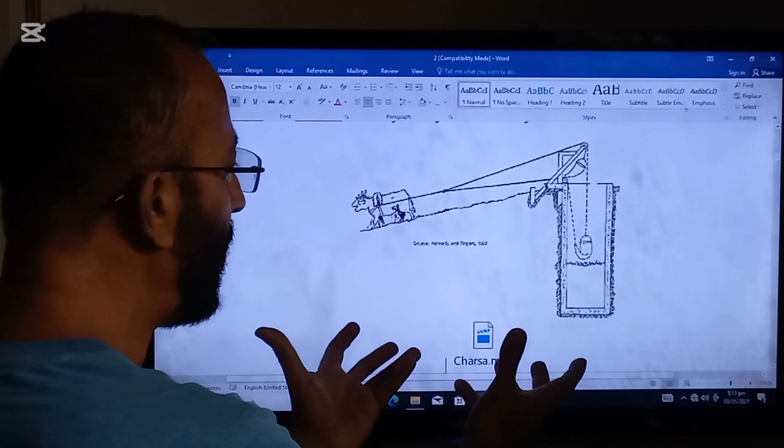This is a diagrammatic representation of this system, that is charsa. One side is animal power and on the other side a bucket is attached that brings water from the well, canal or river into the agricultural field.

We are going to show you a video to understand this type more clearly. So this bucket is bringing water out of the canal, river or well, and on the other side animal power is attached.

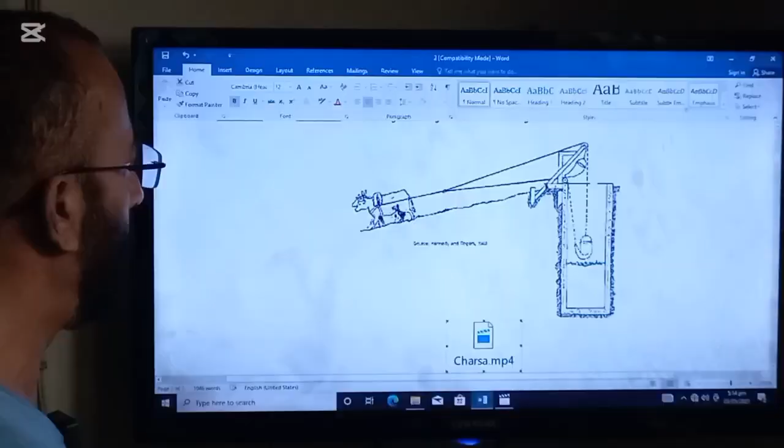The next category is Persian wheel, an improvement upon shadoof and charsa. It consists of a horizontal wheel attached loosely to a vertical wheel. An animal, donkey or bullock, moves the horizontal wheel that in turn moves the vertical wheel. A number of buckets are attached to the vertical wheel and they are dipped into a traditional well to get filled with water.

As the buckets are brought upward, they are emptied into a long narrow duct or canal that carries water to the nearby agricultural field. It is more efficient than the shadoof and charsa methods and therefore still used by many subsistence farmers, especially in the Barani areas like the Potwar Plateau.

It irrigates a relatively greater area of land in lesser time. Advantages of the Persian wheel: it is a cheap method of irrigation, few workers are required, animal power is used, and there is enough availability of water on time. But the disadvantage is that the Persian wheel can be used for small scale only.

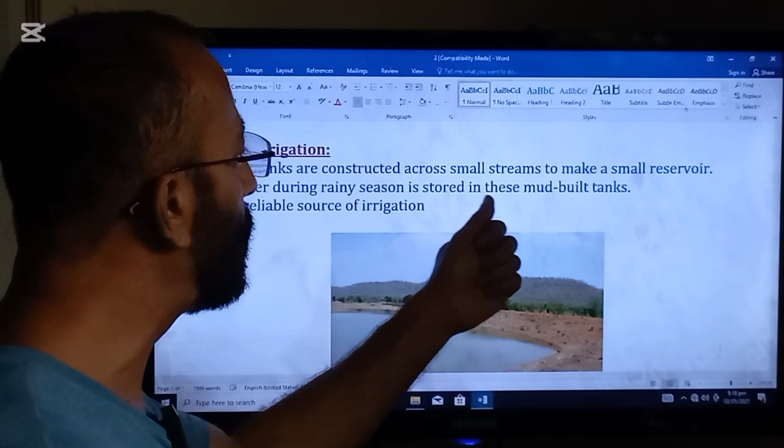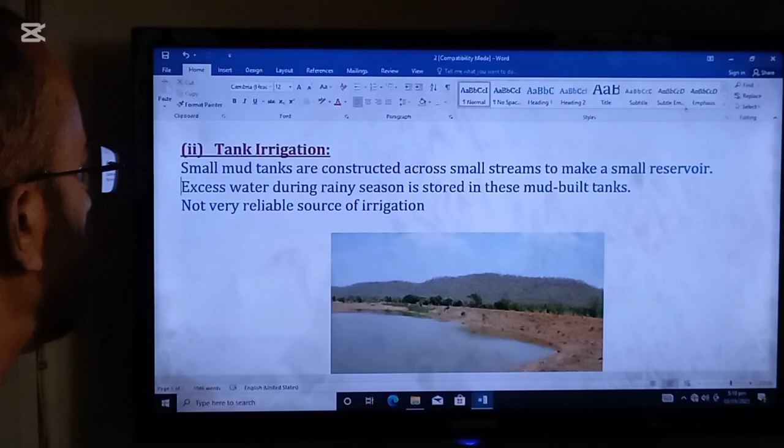Next type is karez, restricted to selected areas of Balochistan. It makes use of the raised water table in the foothills. A horizontal subterranean underground canal is dug in the foothills. The canal runs from a few to several kilometers before it opens on the surface to supply water to the agricultural fields.

In order to maintain and desilt it regularly, vertical shafts are installed at intervals. As it remains underground, loss through evaporation is minimum. A single farmer cannot afford it, so a group of farmers jointly build it. Repair and maintenance is difficult and costly. As a result of the recent drought-like situation, several karez in Balochistan have turned incompetent.

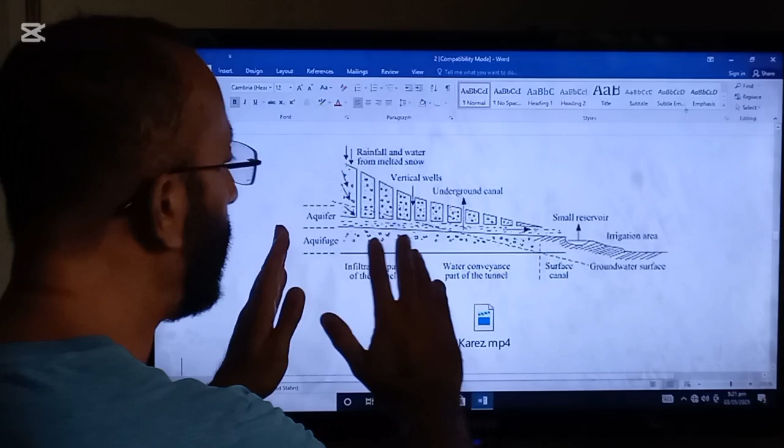Once built, labor of the work is not required. Water does not evaporate in this method. This is the only available source for miles in dry areas. Here is a diagrammatic representation of the karez.

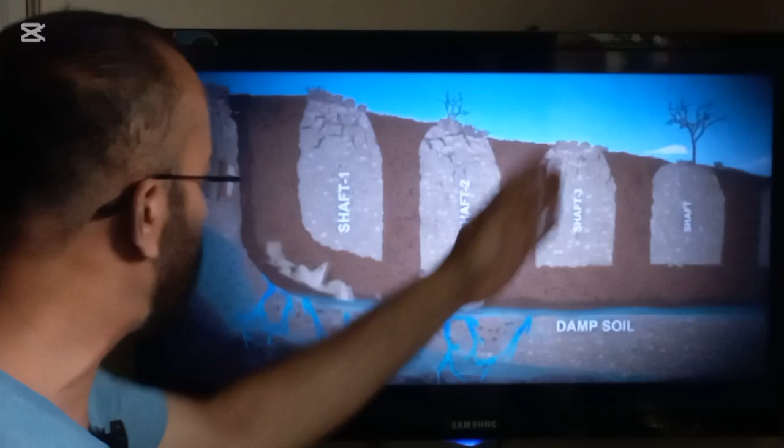We are going to show you a video to understand it more clearly. This is the mother well from where water is coming, and these are shafts to desilt the canal on a regular basis. Here water is coming from the mother canal to a long area. Look here, and from here water comes to the surface, and water is provided to different agricultural lands.

Okay, next are modern methods of irrigation. These include perennial canals, tube wells, tankers, sprinklers or spray irrigation, and last one is trickle or drip irrigation.

The first type we are going to read is perennial canals. Taken out from water reservoirs, dams and barrages to supply water to Rabi, that is winter, and Kharif, that is summer crops, supplying water throughout the year. An extensive and complex network of canals exists in Punjab and Sindh, designed along modern lines by the British and later improved under the 1960 Indus Water Treaty.

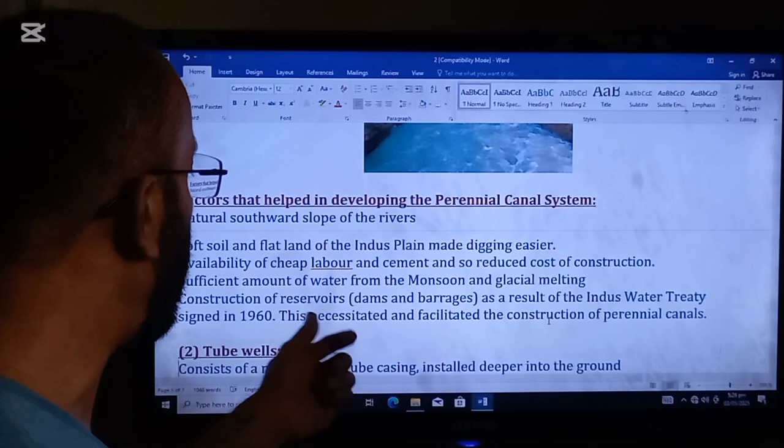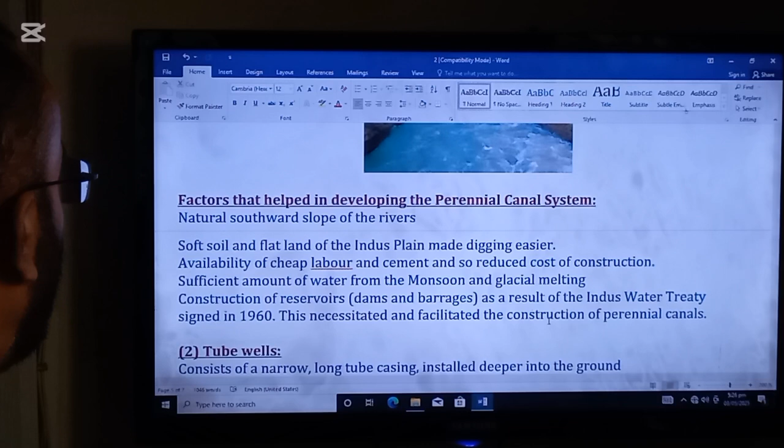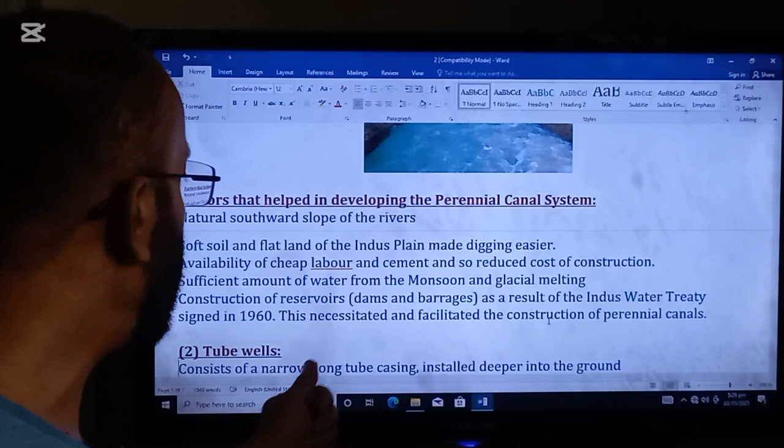Next topic is factors that helped in developing the perennial canal system: natural southward slope of the rivers; soft soil and flat land of the Indus Plain made digging easier; availability of cheap labor and cement, reducing cost of construction; sufficient amount of water from monsoon and glacial melting; and construction of reservoirs, dams and barrages as a result of the Indus Water Treaty, signed in 1960. This necessitated and facilitated the construction of perennial canals.

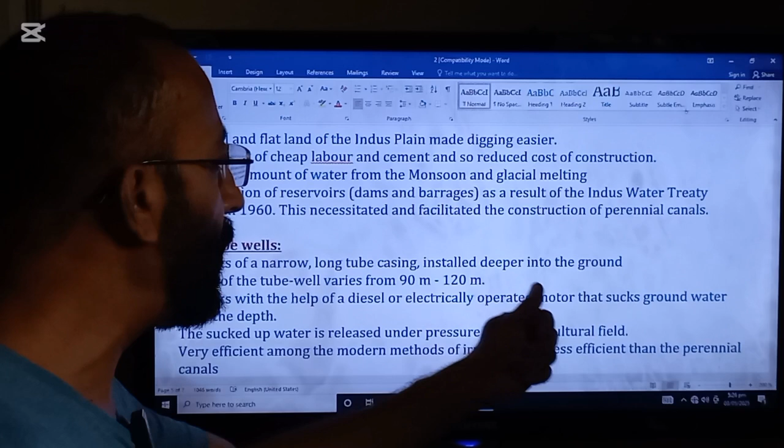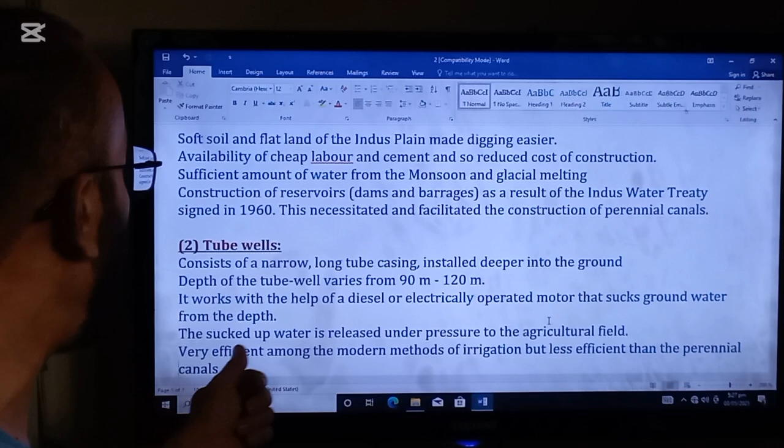Next type we are going to read is tube wells. They consist of a narrow, long tube casing installed deeper into the ground, with depth varying from 90 to 120 meters. It works with the help of a diesel or electrically operated motor that sucks groundwater from the depth, and the sucked up water is released under pressure to the agricultural field.

Very efficient among the modern methods of irrigation, but less efficient than perennial canals. No risk of waterlogging and salinity. Tube wells are rather used to treat some problems, and are very popular in Barani areas of Potwar and Balochistan. Tube wells are used on commercial levels.

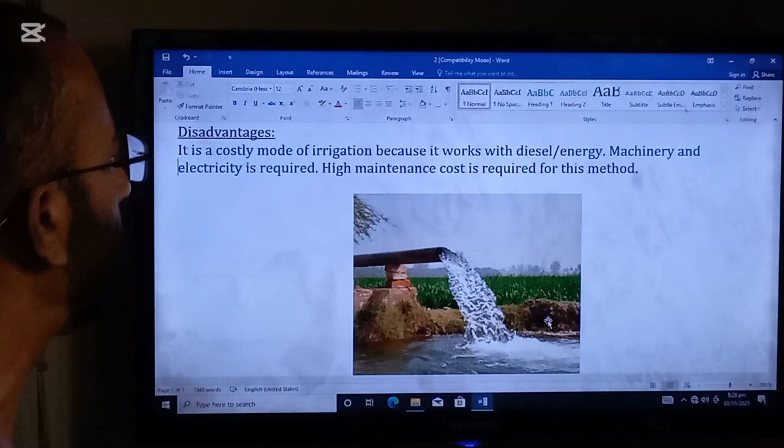Disadvantages of tube wells: it is a costly mode of irrigation because it works with diesel and energy, machinery and electricity is required, and high maintenance cost is required for this method. And this is a diagram of the tube well.

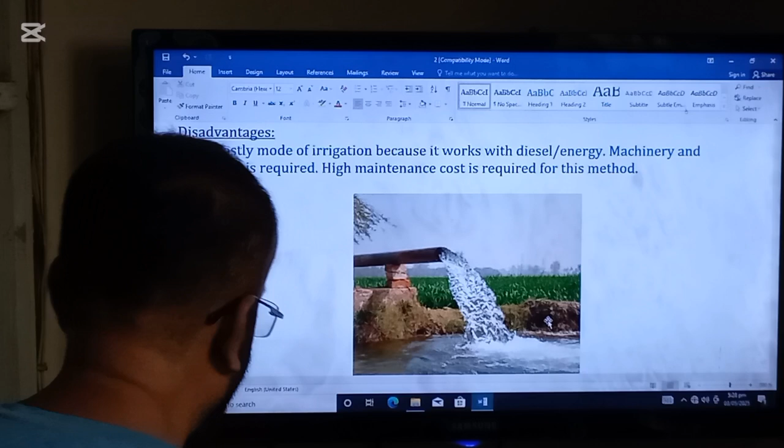Now we are going to show you a video to understand this method more clearly.

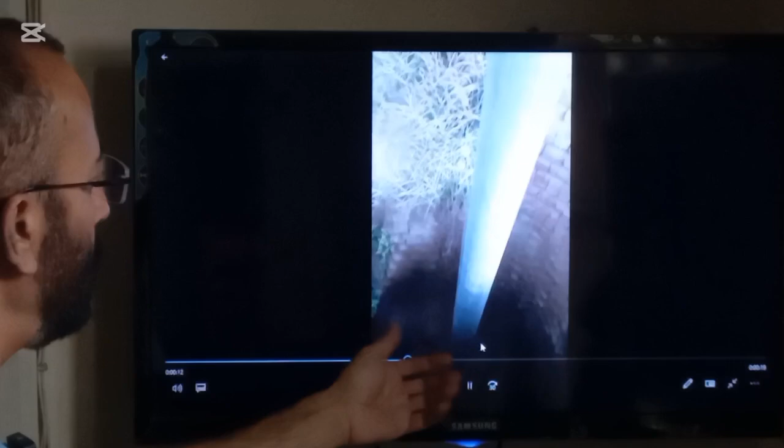So this is working on diesel. Here is a tube well. Here is a tube that is dug meters under the ground, and water is pumped out from the ground to the surface. So here water is coming, and it is given to the agricultural land.

Okay, next method is tanker irrigation. Automobile tankers collect water from water channels like canals, ponds, etc. and supply it to the farms and households in emergencies only. Not an efficient means of irrigation, as only a small amount of water can be supplied, and this is an expensive method.

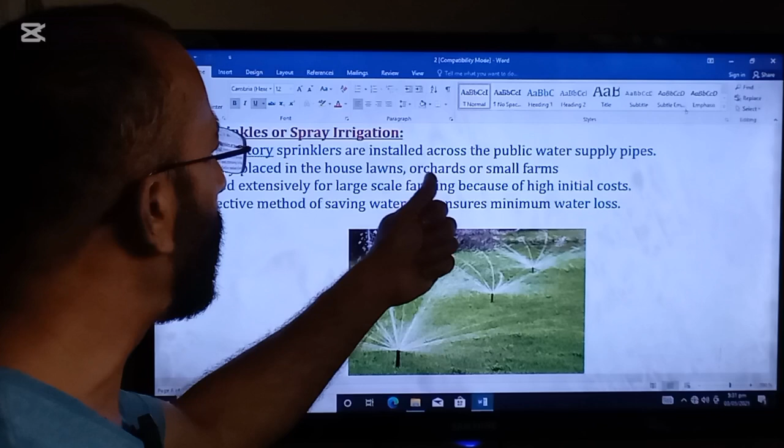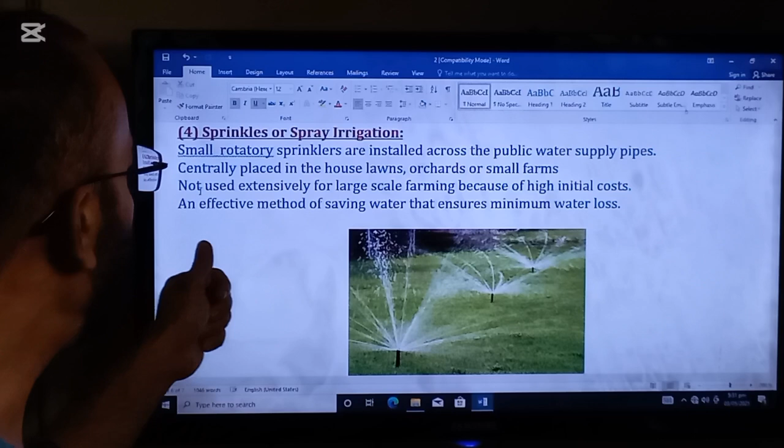The next method is sprinklers or spray irrigation. Small rotatory sprinklers are installed across the public water supply pipes, centrally placed in house lawns, orchards, or small farms. Not used extensively for large-scale farming because of the high initial cost. An effective method of saving water that ensures minimum water loss.

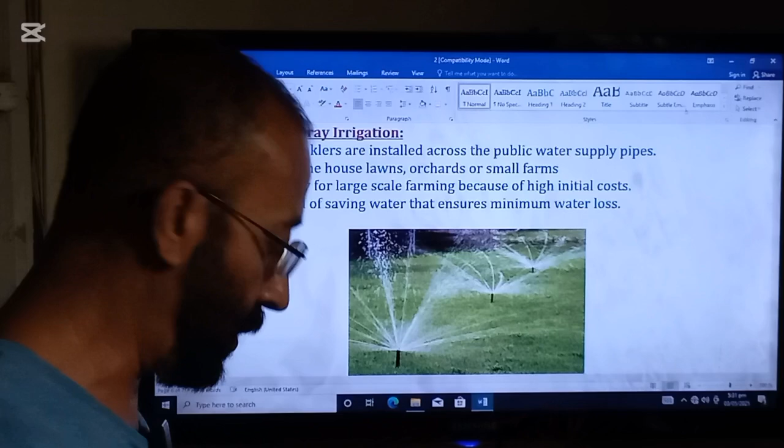And here is a picture of the sprinklers. Definitely you have seen it somewhere in your country. Now we are going to show you a video to understand this more clearly. These are the sprinklers. Loss of water is minimum because the targeted area is hit through this method.

Okay, next method is drip or trickle irrigation, one of the most modern methods of irrigation being popularized gradually in Pakistan. It consists of a network of tubings that have multiple holes through which water is released under pressure. The whole network is connected to a centralized water source.

Water released in this way is highly precision-oriented as it is sprayed on the selected parts of the crops only. Initial installation cost is high, but in the long run it may become somewhat economical as it maximally prevents unnecessary loss of water. In view of the imminent danger of serious water shortage, drip irrigation method seems to be a very useful device of irrigation of modern times.